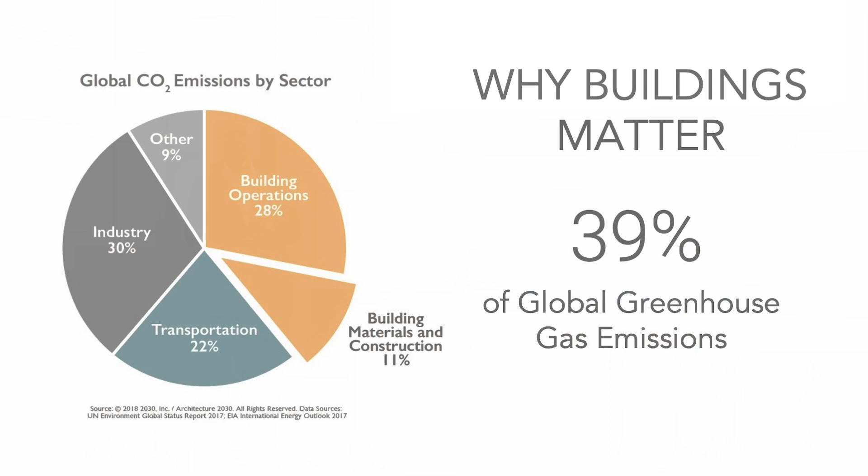So for burning gas in the building or using electricity that was made with a fossil fuel, there's CO2 emissions related to that. The other thing is building materials. When we make building materials, we use energy, or in making the building material, there's a reaction that releases CO2 or some other greenhouse gas. Like refrigerants for cooling systems, refrigerants are greenhouse gases in and of themselves. So building materials are part of the picture as well.

I also did want to make the point that building emissions or energy emissions, and I'm hoping that you guys have talked about this, do have a negative impact on our health. Okay, and so we could talk about climate change as sort of a future thing, although we're starting to feel it now, but air quality in America and many other countries is significantly poorer because of particulate emissions and emissions from burning fossil fuels.

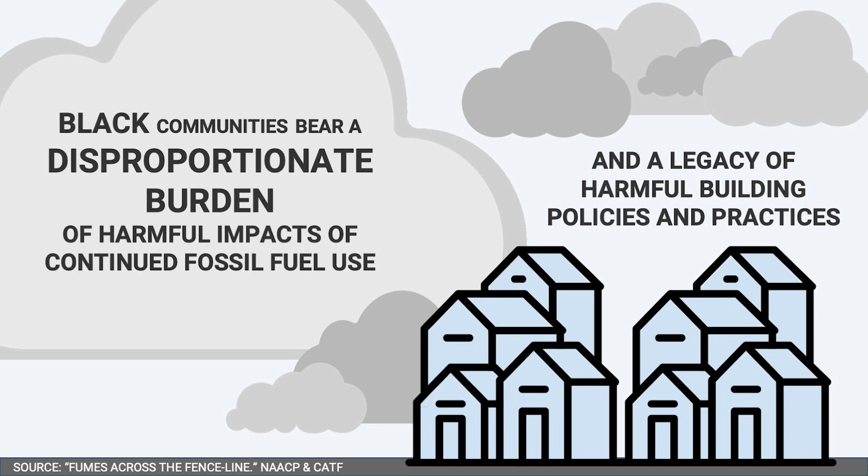And there's an environmental justice part in that as well, that Black communities in our country have a disproportionate burden of these negative emissions. And so the faster we can get fossil fuels out of the picture, the better off we're all going to be, but also we'll have a better and more equitable society.

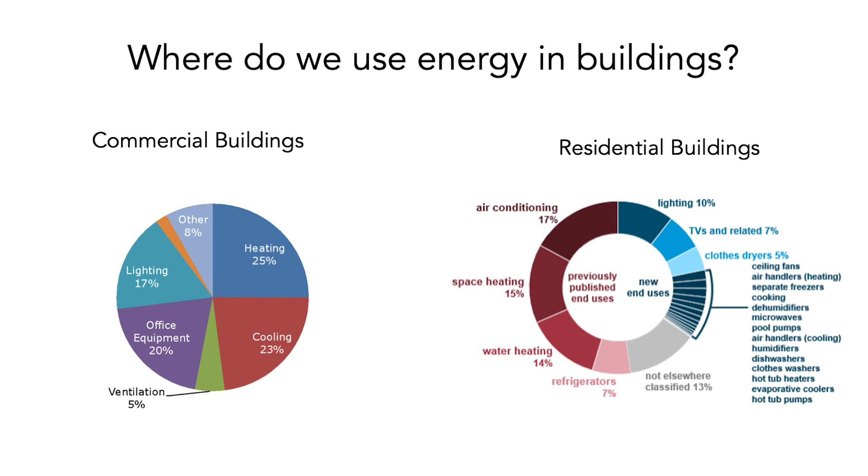So getting back to where do we use energy in buildings, and I do like to think about this if you're starting to think about buildings: where are the emissions? Where does that relate, or how does it come in? So commercial buildings and residential buildings are different. And we could take an industrial building as well, and a lot of times industrial buildings have to do with the process. But in a commercial building, there's three main categories. And most commercial buildings are offices, but there's lots of other types of commercial buildings.

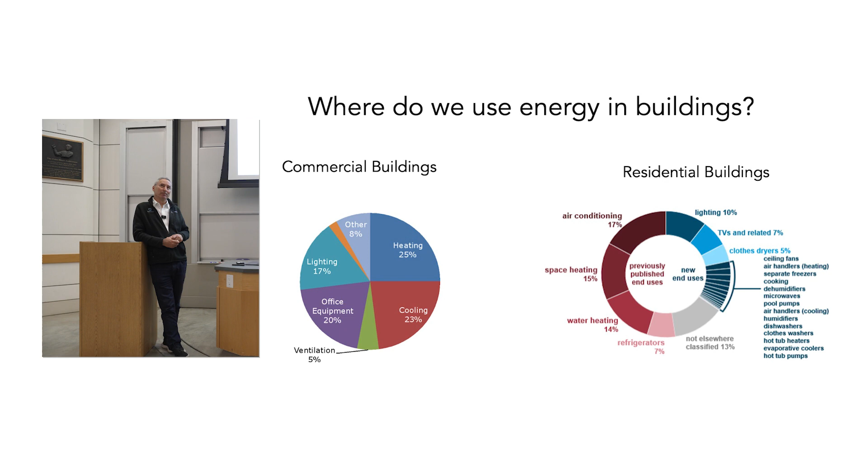But in a typical commercial building, which would be an office, or we could say non-residential building, the heating, cooling, and ventilation system is usually the biggest use. And that's if we look at national averages. In the Bay Area and at Stanford, Palo Alto, we have a mild climate, so it's less as a proportion. But we can say somewhere between a third and a half of energy consumption goes to heating, cooling, and ventilation in buildings. So I'm going to talk a little bit about that.

The other area is office equipment and other things that we plug in, so we call those plug loads. And then the third important category is lighting. Lighting, it's everywhere in buildings. So lighting does actually consume a good amount of energy, and it depends on what kind of lighting and things. I'll talk a little bit about lighting. And then there's miscellaneous and other, like elevators and such. There's a variety of things in the other category.

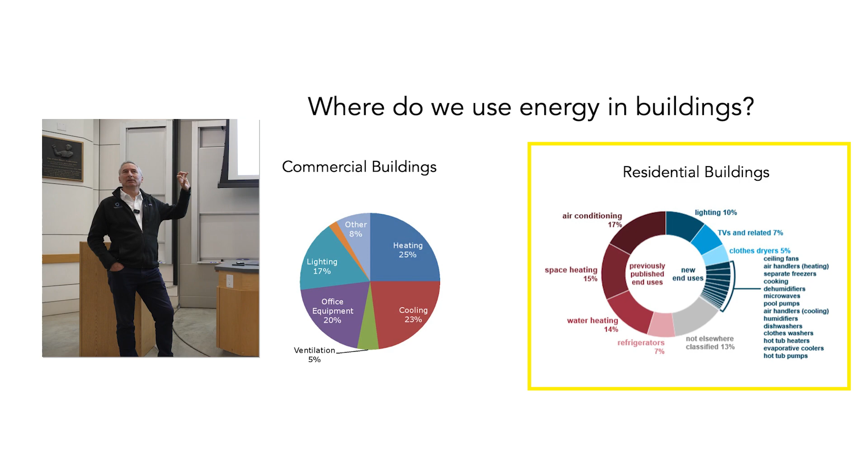In residential buildings, it's a little bit more complex because we have things like clothes dryers. There's a lot more domestic hot water consumption in a residential building. We have refrigerators. So there's a lot more things going on in residential buildings, but you can break it down into the heating, cooling, ventilating, lighting, appliances, and water heating. Those are the main categories.

So if we start to break it down for each one of those categories, how much energy is being used, what can we do to improve the efficiency of that, and then ultimately what can we do to decarbonize that? When you start breaking it down into these pieces, it becomes a little bit easier and makes more sense. So again, as I was saying, there's the operational side of greenhouse gas emissions, mostly CO2, and then there's the embodied carbon side, so the two elements.

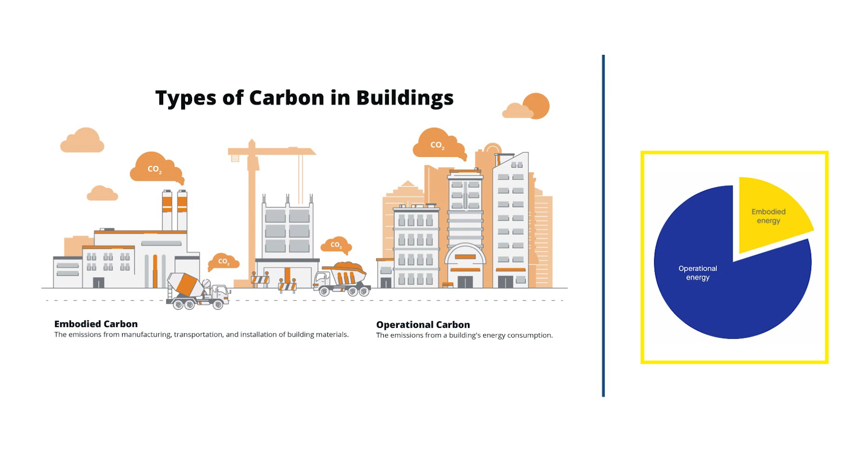And you can see the pie chart over on the right. If we can get the operational side to be decarbonized, and that's actually pretty easy, and I'm going to show you that, then we've got this little bit more difficult part of the pie. It's smaller, but the embodied carbon. And if you are at all involved with buildings, you'll know that probably the biggest thing in buildings as far as embodied carbon is cement.

Making of cement. Not only does it take a lot of energy, usually burning natural gas to create the reaction, but when the reaction happens, it releases CO2 in and of itself. So 6% plus or minus of global greenhouse gas emissions are related to making cement that goes into concrete. So if we expand out this thought of building decarbonization and start thinking about embodied carbon, what can we do to make a low or zero embodied carbon building? How do we do that?

Wood has low carbon emissions in harvesting it and preparing it and transporting it to a building, but it also sequesters carbon. It pulls carbon out of the atmosphere, and it's in the wood, as long as that building doesn't burn down, right? So low embodied carbon building materials. Wood is one. There's many, and then with the remaining carbon that is emitted in getting those building materials to the site, you can do things like carbon offsets.

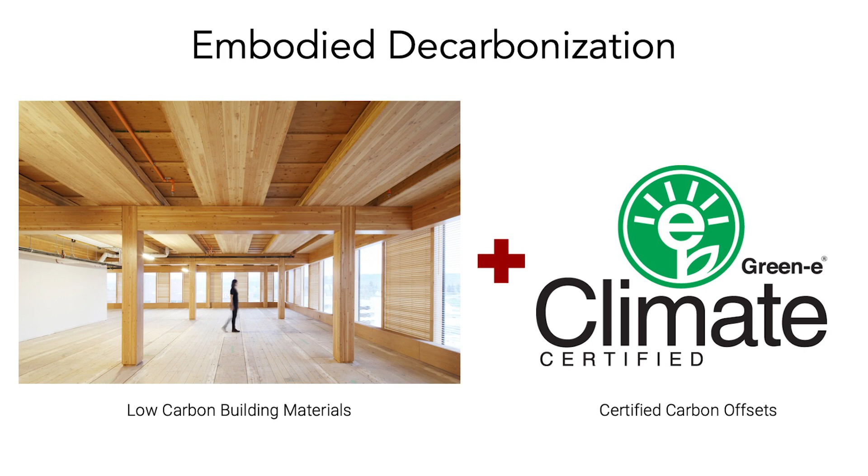And with carbon offsets, there's a lot of debate about how valid they are, but there are higher quality carbon offsets and there's lower quality ones. So when we're working with clients who want to do offsets, we steer them in the direction of higher quality offsets. So a lot of times what we're doing is this comparison for a project. What does concrete look like, steel and wood? And this is the embodied carbon for a 175,000 square foot office building that we were working on.

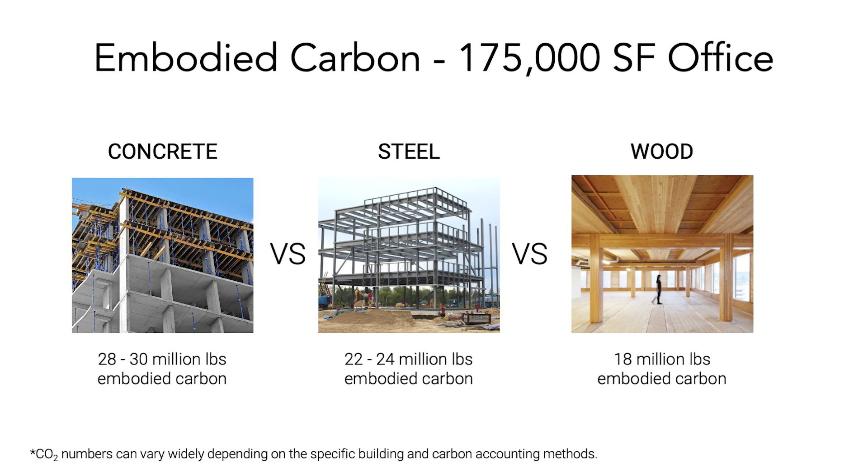And so we were comparing, and you can see that the concrete structure is not quite, but it's in the neighborhood of twice the wood. Okay, and so steel is a little bit better, but wood is much better. So there's a lot of discussion. Now, the concrete industry is like, well, wait a minute, this is bad news for us. So the concrete and cement industry are starting to think about how can we create different cement mixtures that have the strength that we need, but have lower embodied carbon.

And there's this one company that's out there called CarbonCure, where they inject CO2 into the concrete mix, and it reacts and can create this nano-sized mineral calcium carbonate, which gets embedded into the concrete. So it's an interesting thought.

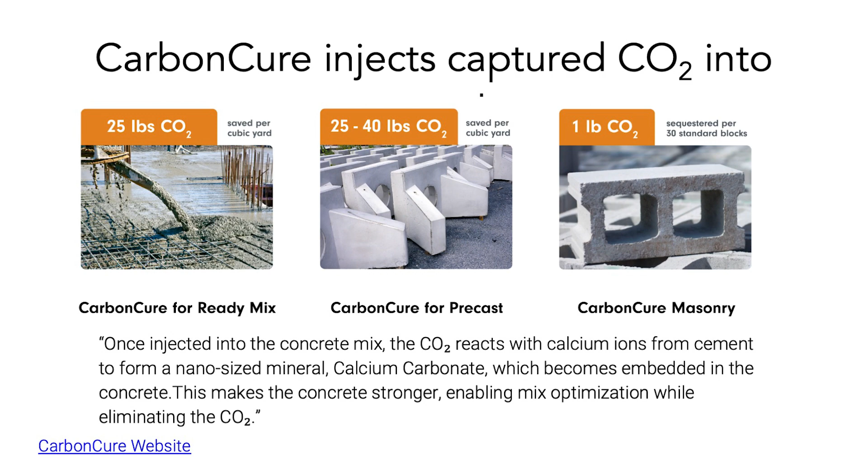There's a lot of research on this topic right now, not just this particular solution, but lower carbon cements. And a lot of that research is happening at Stanford. And there's several startups now that are manufacturing low carbon cement at small scale, and they're hoping to figure out how do we scale it up and make it affordable.

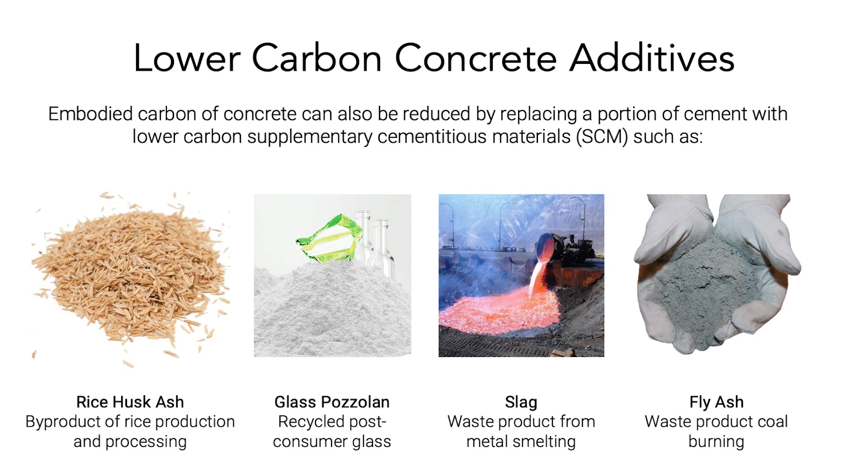So stay tuned, lots of changes are going to happen there. And there's even concrete additives that we can use that are usually a waste product or recycled product that can be added to cement that provides strength, but it's a product that we otherwise wouldn't be using, and it displaces some of the cement. So that's something that is actually being done now, and it's been around for quite a number of years.

So anyway, there's lots of things to talk about there, but I want to get back to buildings and energy, and the operational side of decarbonization has a lot to do with the energy. The idea is very simple. So first we make buildings more energy efficient, and there's a lot that can be done to make buildings more energy efficient. And then we make that building an all-electric building.

So we have an all-electric efficient building, and then we connect that all-electric efficient building to renewably generated energy, or renewable electricity, right? And so the final step is that renewable electricity powering our efficient all-electric building. And that's how we're going to do it, and that's how we are doing it.

Many buildings are being built with this framework in mind and are now plus or minus fully decarbonized on the operational side. So let's talk about the efficient building first. How do we get energy efficiency? And just thinking about lighting, heating, cooling, the different things that I mentioned.

Lighting is one of the things where there's been a full transformation in how we provide lighting in buildings. And we started, and many of you probably are familiar with incandescent lights. Then we used fluorescent lights, and there's lots of fluorescent lights in this classroom. And now we're using LED lighting of all different shapes and sizes.

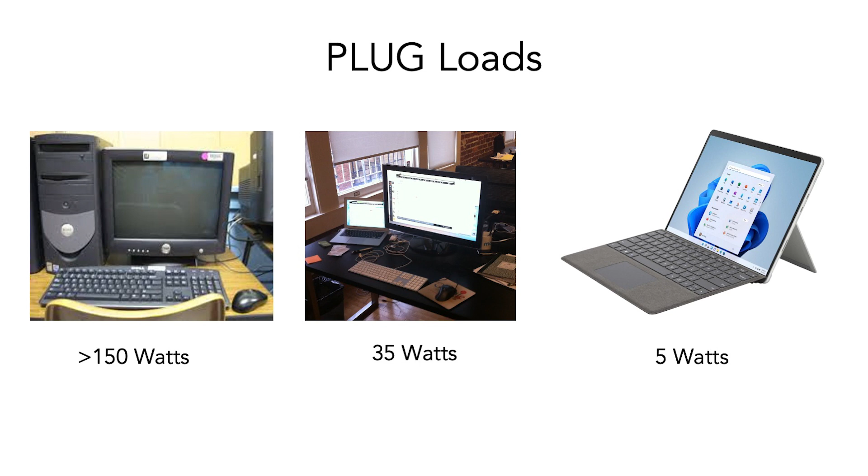And the new generation of laptops that you guys are using are very low energy because the manufacturers want the battery to last longer. Battery life has driven low power consumption computer chips to become a thing, not only in your laptops, but also in your cell phones. Right? So computer chips now are significantly more powerful than the ones that we had 10 or 20 years ago. And when I say significant, I don't mean 2 times more. I'm talking about 1,000 times or 10,000 times more powerful. But they're using a lot less energy than before. So if you look at that watts per compute ability, that ratio has just gotten incredibly good.

On the other side of that, we use a lot more computing. We do a lot more with computers than what we used to do. So the whole cloud and data centers, that has actually become a big energy use that we need to take into account. But in the buildings, the numbers have gotten really quite good.

In heating, ventilating, air conditioning, it's a similar thing. We did start out with buildings that were naturally ventilated 100 years ago. There was no air conditioning system. You just had to open the window. Very low energy, but didn't quite work in a lot of climates, right? So we started developing much more complex heating and cooling systems in buildings.

The state of the art in the 1950s was this thing called a constant volume system, where you're always running the fan at full speed and you're running the cooling at full speed, and then you use heat to modulate the temperature in the room, even though the air being delivered is cold. We use heat to heat it back up, and it's always going at full speed, constant volume. It was energy hog galore. I mean, really, really bad.

And now we're using variable air volume systems that cut the energy down in commercial buildings basically in half. And there's a new generation of heating and cooling systems like chilled beams and radiant panels, and even low energy versions of variable air volume systems that are significantly better. If you're looking for a good example of that, the Y2E2 building at Stanford uses chilled beams; it was built about 10 years ago and is much lower energy than our variable air volume systems. Again, just trying to give you a snapshot of what's possible.

When we do a standard pumping and piping system for a heating and cooling system, it usually works out to about 15 watts for every gallon per minute of fluid that we're pushing around, heating and cooling water, right? When I work really hard and do my low friction design, which I love to do, and my mentor was one of the world's best people on that, we use 45s and smooth pipes, and we design things in a very smooth way. I can get to 7 watts per GPM.

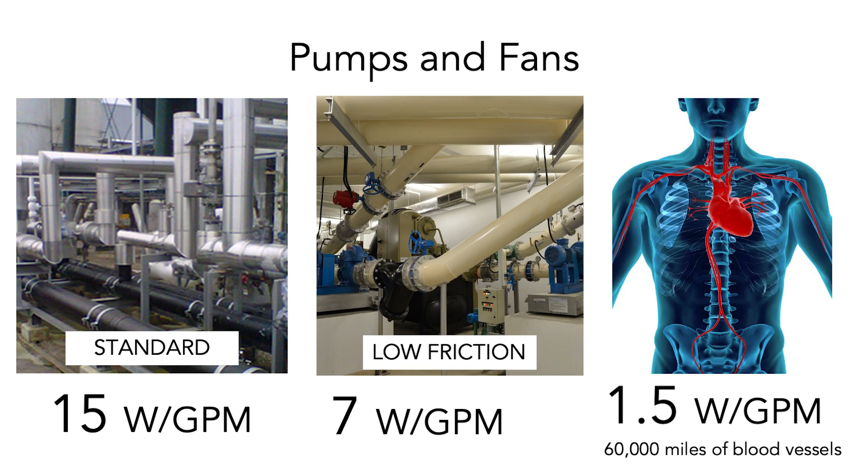But I feel like I'm still a failure because, and you can look this up, the human heart operates at about 1.5 watts per GPM. And in your body are 60,000 miles of blood vessels, so it's quite a complex array and pumping system. And if humans were to try to recreate that, we'd end up with something where your heart would need to be 10 times bigger than what it actually is.

So just imagine that. You'd have to eat a lot more food and spend more time of your day eating, right? So that'd be sort of annoying.

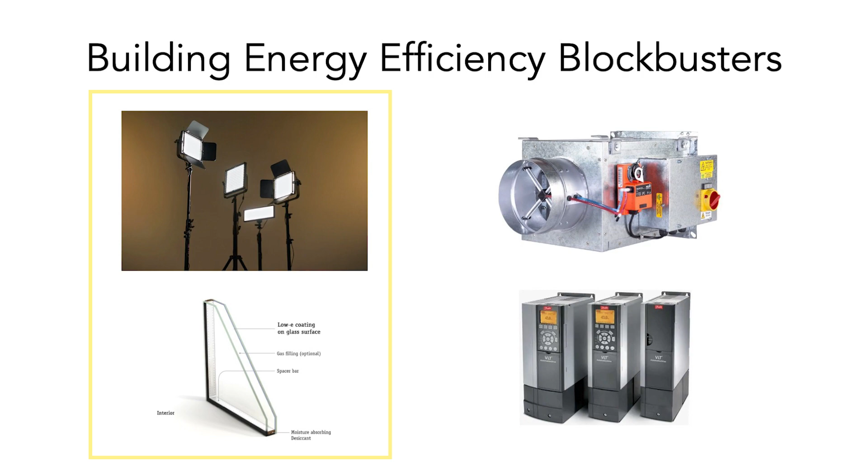So on the bottom right is variable speed drives, and we use those variable speed drives now to control the speed of a fan or pump, so it can go up and down instead of that constant volume, constant flow. We're now varying speeds of pumps and fans, and this is also used in industrial processes and such. And then low emissivity windows, LED lighting, all that stuff has really changed how we do buildings.

There's a standard for building energy efficiency that many states use and many building designers use as a guidepost for how efficient is your building, or just what's the minimum that we need to do to make it an efficient building. And it's interesting, that standard was first written in the 1970s during the oil crisis, when people were starting to say we need to think about energy. If you compare a building that was designed to the standard around 1980 to where we are today, and meeting the standard is not very hard, it's in the neighborhood of a 50% lower energy consumption.

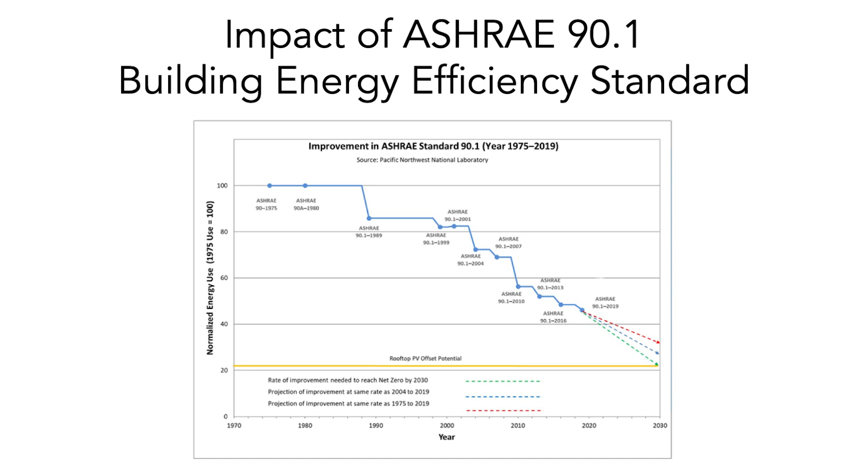So we're designing buildings today as a common practice that are 50% lower energy than where we were in the 70s or early 80s. And for me, pretty much all the buildings I design are using 50% of this standard. So there's another 50% that's easily harvestable. And what I try to do is be out in front so that the people who write the standard know that it's not that hard to do even better, right? So that's been put together.

And I did a thing for Duke Energy a while ago, in North Carolina, where we discussed with a group of people what were the state of the shelf, the things that were off the shelf that we could do to make buildings more energy efficient. So we said, look, the baseline would be to meet that 90.1 standard. We apply a better building envelope, better glass, better insulation, not overly complex, and then better lighting with daylight, where the light can dim down automatically.

And then we do some plug load improvements, some things that we could do to get computer energy use down. And then our low friction system, which I was showing you, and then heat pumps. We put that all together and we can get 44% savings, really easily. I was just saying, state of the shelf, easy stuff. And a lot of folks on the video presentation I was doing were like, wow, but several were like, yeah, I've done that, right? So making buildings more efficient is not necessarily that hard. We leverage a lot of things that are currently available.

The thing that I love the most is the efficient building envelope, more insulation. It's passive, there's no moving parts. It's like my solar clothes dryer. So I love the passive strategies.

And then we put solar on 40% of the roof and then 80% of the roof. And when we got to 80% of the roof with solar, and this is a 3-story building, the solar was making enough electricity on an annual basis for the building. So the building was making all of its own energy. And then we also like to use batteries in buildings now for obvious reasons.

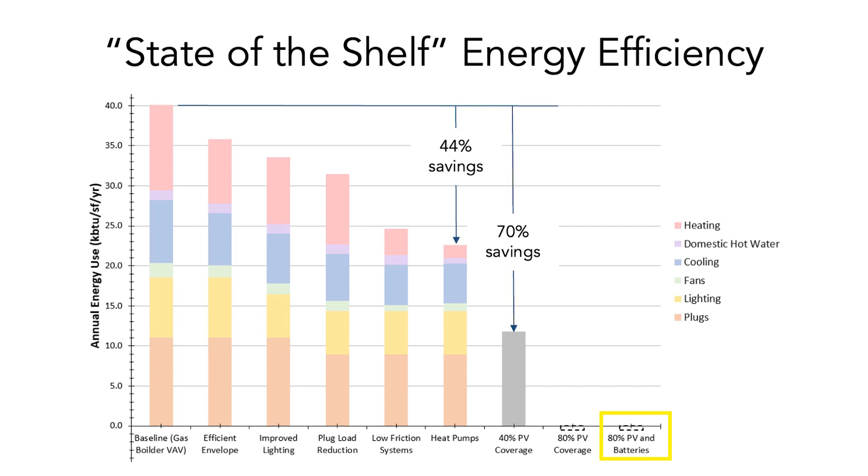If we work in a more integrated process, so if I say to the architect, if you put more insulation in the wall, then my heating system can be smaller. It's very simple stuff. But so much of design of buildings is disintegrated, where the architect does their thing, the engineer does theirs, everybody sort of works in separate silos and you don't come up with good results.

I think AI is going to be really important for energy optimization in buildings. Buildings generally, especially commercial buildings, don't work very well. They're not tuned up because there's so many data points and there's lots going on. AI is going to help to fix that, and I've already seen a few companies in that area.

Induction cooking, which I'm going to show you a little bit about. And then solar and batteries, of course, is transforming buildings. And that solar and batteries is either at the building or at utility scale. So I'm sure you guys are talking about that, right?

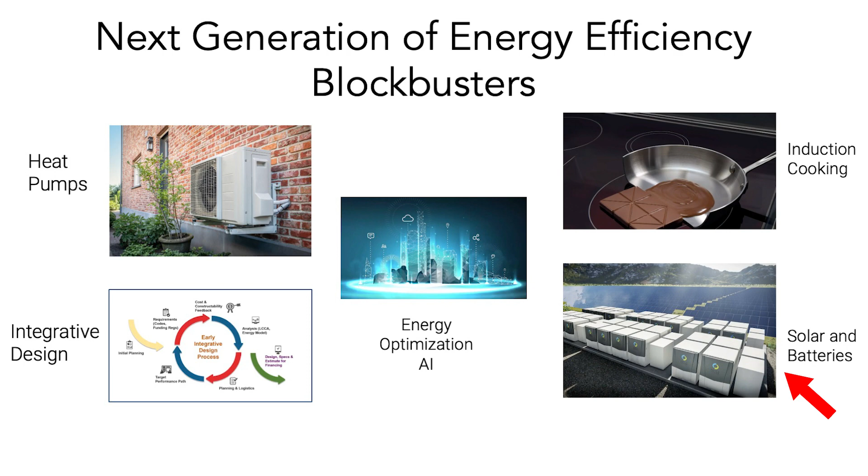So there is a professor, Jim Sweeney at Stanford, now emeritus, who wrote with his grad students this book called Energy Efficiency: Building a Clean, Secure Economy. So Jim is interesting because, and Diana knows him much better than I do, but for a long time he was a real skeptic on energy efficiency because he's an economist, a somewhat conservative economist who worked in the Reagan administration. He says, this energy efficiency thing, it's not really a thing.

People will just buy it if it makes financial sense and so on. But there were a lot of people pushing him to think about it differently. So he said, look, I'll do a study. I'm going to get my grad students together. We'll do a study. And what they did is they picked apart the U.S. economy and they said, what was the energy intensity or efficiency of airplane travel? So how many gallons of jet fuel per passenger mile over a 30 or 40-year period?

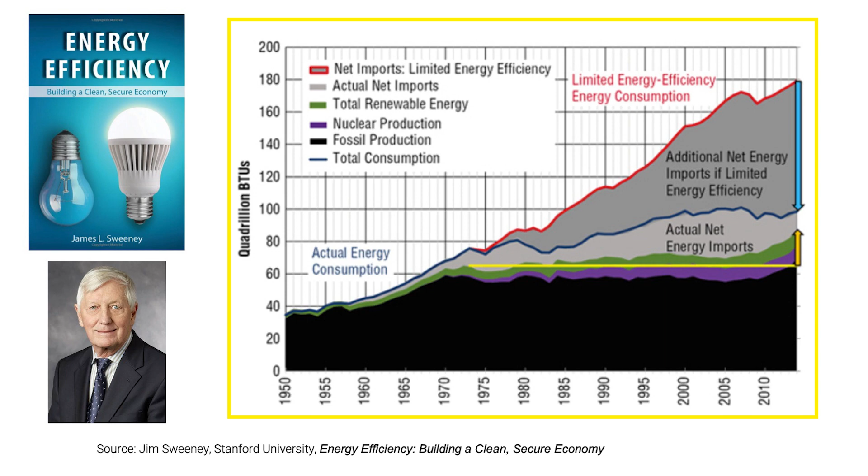And this was through 2015. So we need to update it, but through 2015, that was significantly more, several times more than all of the new nuclear or renewable energy that was added to the US grid, right? So this is a super significant finding. Energy efficiency is a resource.

And so a lot of energy planners and policymakers have been thinking about energy efficiency as a resource and part of the mix of how we meet energy demands or service demands. We don't really have a demand for energy. We have a demand for light or heat and cool, right? So we just want to deliver those same things, but by using less energy.

So the next step is this building electrification. And how are we going to electrify buildings? So if you think about it, buildings already use a lot of electricity. Lighting is electricity, right? We don't use gas lamps anymore, thank goodness. But we still do burn fossil fuels at buildings.

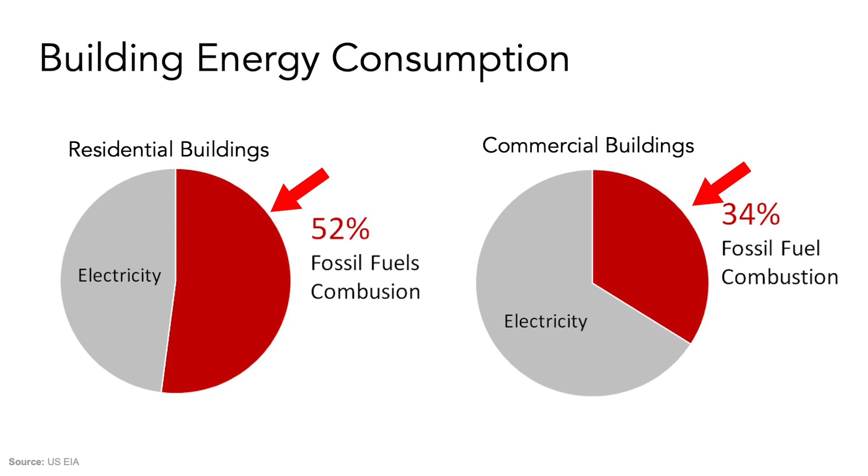Most of the burning of fossil fuels at buildings in the US is natural gas used for heating different things. So it could be heating a room, or heating water, domestic hot water for showers, or a dryer, or cooking, right? So in the residential sector in the US, half of the energy is used for these heating needs. And then in commercial buildings, it's less, like 34% nationally, right? So there's still a big chunk that's natural gas. Meanwhile, the electric grid is getting lower and lower carbon every year.

So 160 cities, 8 states, and this is a year or two old, I think there's a little bit more, have already made commitments to be 100% carbon free on their electricity. And so in California, our plan is by 2045, all of our electricity will be carbon-free electricity. That's actually a state law. All of the electric utilities have to follow that, and they're actually well ahead of schedule. And each time there's been sort of an improvement or a ramping up of the requirements, utilities have been able to beat it, a couple years ahead of schedule. So.

The electric grid is getting cleaner, and burning natural gas still emits the same amount of CO2, and there's not a lot we can do to change that. So the idea is move over to electricity. And so the different gas uses that we have, how do we electrify them? So the space heating, gas boilers, burning gas to make space heating, one form or another, we can use heat pumps to make heating, and I'll show you that. Domestic hot water, we can also use heat pumps. This is an efficient electric way of making heat. And then gas cooking, we can use induction cooking.

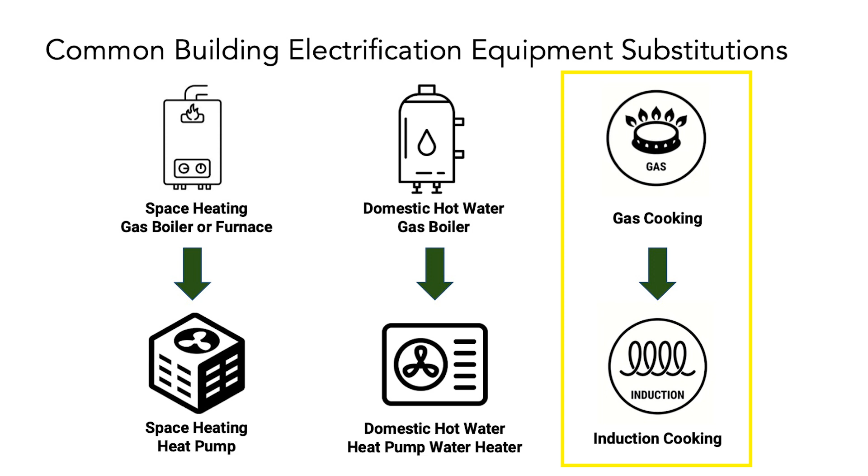So how does a heat pump work? Well, if we compare it to a boiler, when we're burning natural gas, you put 100 units of gas in, and we'll get somewhere around 85 units of heat out, 85% efficient, right? But with a heat pump, it's really interesting. It uses the refrigeration cycle, which is in air conditioning systems, refrigerators, your car air conditioner. We use the refrigeration cycle to pull heat out of the outside air. So even on a cold day, we can pull heat out of the air. And sometimes you pull it out of the ground with a ground-coupled heat pump.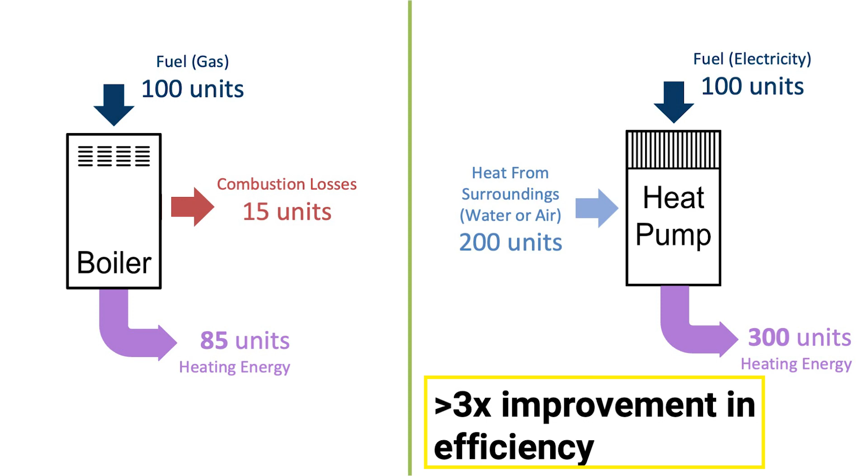So we use the electricity to run the compressor. The electricity isn't actually turned into direct heat. It's used to run the compressor that then puts heat into whatever form, air or water, that we're trying to create to heat a building. So we can put 100 units in and we get 300 units of heat out, right? Remember over here on the gas, we put 100 units in, we get 85 out. So this is significantly better. It's, in a sense, 3 times better or more in most heat pumps, improvement in efficiency. So that is a very big deal.

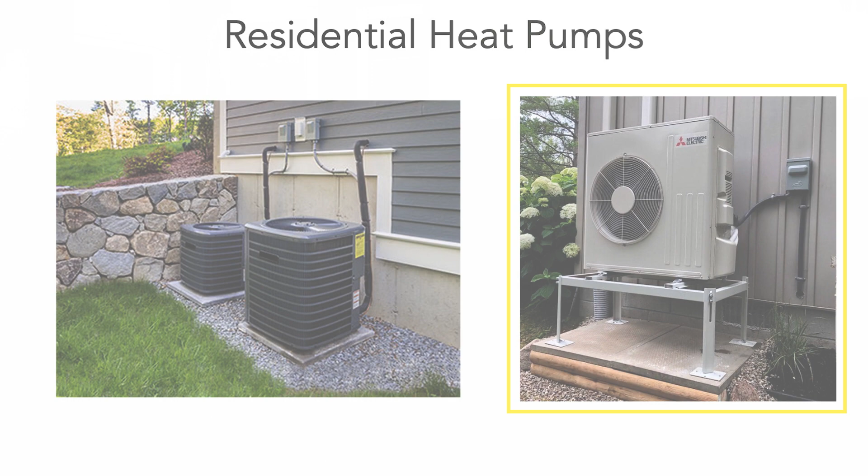And this is what heat pumps look like in a residential setting. And the ones on the left look a lot like an air conditioner, and that's because they are. They're a heat pump that can make heat in the winter, and then it reverses in the summer, it can make cooling. So that's one of the nice things about heat pumps is it can do both. So on the residential side, you can buy one piece of equipment to do both, if you're in that climate that needs both, right? And there's a new generation of these smaller units that are more efficient than the ones on the left. And they're widely used throughout the world.

And heat pumps in residential are a big part of Europe's plan to quickly and rapidly get off natural gas, because of the Ukraine war natural gas supplies were rapidly diminished, and so part of the solution was like, let's quickly ramp up the use of heat pumps. There's a huge growth in the heat pump sector globally. That is, the manufacturers are really doing quite well.

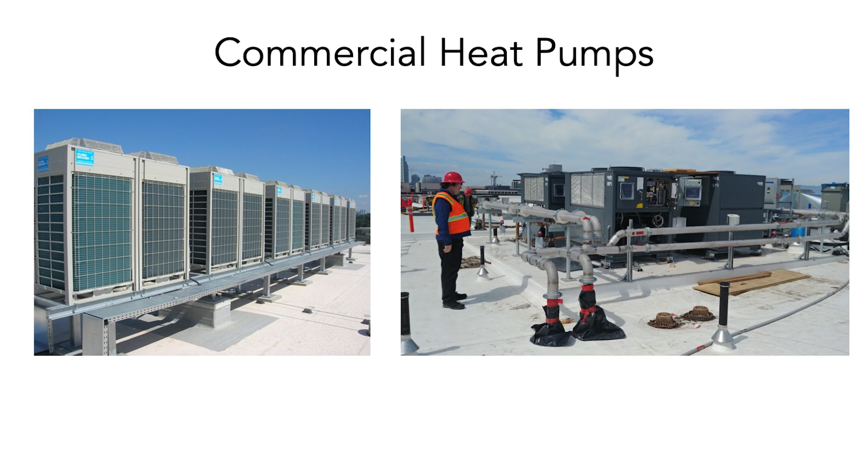But there's commercial versions of heat pumps as well, and this is where I work, and these are a couple of buildings that I've done where we have big racks of heat pumps on the roof, and there's different types of systems, and they'll make heating and cooling or just hot water. The one on the right is for making hot water. The one on the left is what we call variable refrigerant flow. It makes heating and cooling. And if one zone of the building needs cooling and another needs heating, the heat actually gets transferred from the hot zone to the cold zone with very little compressor activity there. So there's some real interesting things that are happening with this new generation of heat pumps.

And then there's very large scale heat pump systems. This is the Stanford Central Energy Plant. And Stanford had a large cogeneration energy system that was installed, I think, in the early 80s. And it burned natural gas to make steam and electricity, and then they used the steam in this special kind of cooling system so they could make chilled water to distribute around the campus.

It turned out that cogen system was the single largest CO2 emitter for Stanford, as in its CO2 footprint, by far. It totally dominated. And it was coming up on the need of a major renovation and upgrade. It was going to cost millions of dollars. And luckily, Stanford decided to not proceed with that very expensive upgrade to a system that would lock Stanford into very high CO2 emissions for several more decades.

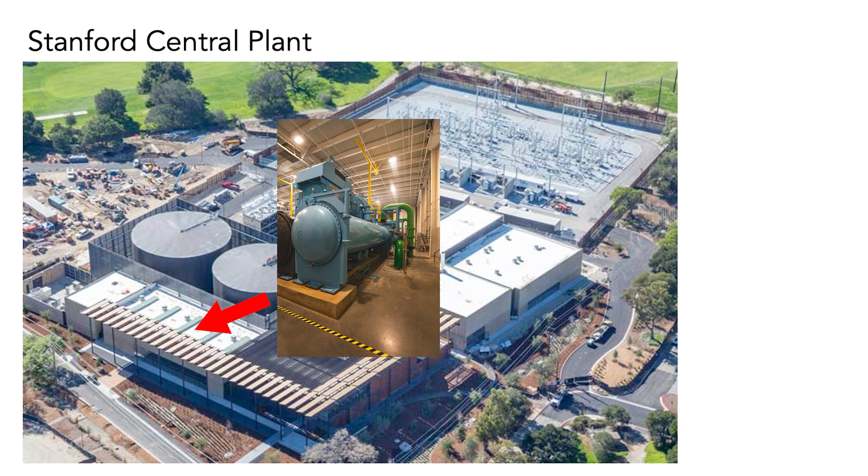And they scrapped that system and they built this new central energy facility. What it is, there's these big, what are oftentimes called chillers, but cooling machines, refrigeration machines that are set up to do heating or cooling or both. And then the tanks that you see there are big thermal energy storage tanks.

So in the afternoon on a warm day, there's lots of cooling at Stanford. So they're sending cold water from the central plant out, but what's the waste product of making cooling? It's heat. Because when you cool the water, you're pulling heat out of the water. And so it's waste heat. So what they do is they store that heat in one of those tanks,

and then the next morning when you need morning warm up, there's lots of days where there's cooling in the afternoon and heating in the morning. The tank will be full of hot water and they'll send that through to the campus, and the campus will start using the hot water that was made the day before as a waste product. So it's very, very energy efficient, but it's also all electric, right? So this is that heat pump idea on a large scale.

When we start talking about cooking, when we burn natural gas in a kitchen, inside, it not only releases CO2, but it releases nitrogen dioxide, carbon monoxide, formaldehyde. And there's a recent study by Stanford, benzene is another thing. And all of these things are in concentrations that are unhealthy. And this is one of the things that adds to people's

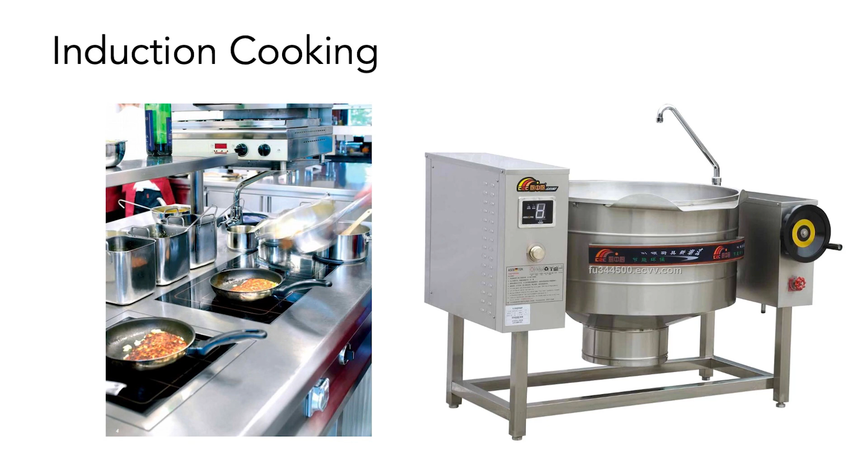And induction cooking is different than using electricity to create a hot element that turns red. Many of you might have seen that kind of electric cooking. It's unsafe and it's not very good. It's not very fast. But induction cooking is where you create a magnetic field with a coil underneath the glass, and when the pot is one that responds to a magnetic field, so not copper, not aluminum, it needs to be steel, stainless steel, cast iron, those kind of pots, then it heats the pot itself and nothing else.

And so the pot actually can heat up quite fast. I have an induction stove in my home, and it boils water faster than the gas stove I had before that, and it was a nice gas stove. And it also is very good at being precise. So I can turn it down to halfway or a quarter way, and it quickly responds to that. So it's actually quite nice.

And now there's a growing number of high-end restaurants that are starting to discover induction cooking. It's good for cooking, but it's also safer for people who work at the stove because of the air quality and burns, and because you're not heating up the surfaces around a gas stove, it's easier to clean up. So I think we're going to see this really take hold. I work with a lot of commercial tech clients in the Bay Area and also abroad, and all their new commercial kitchens, like restaurants, they're putting in as 100% electric.

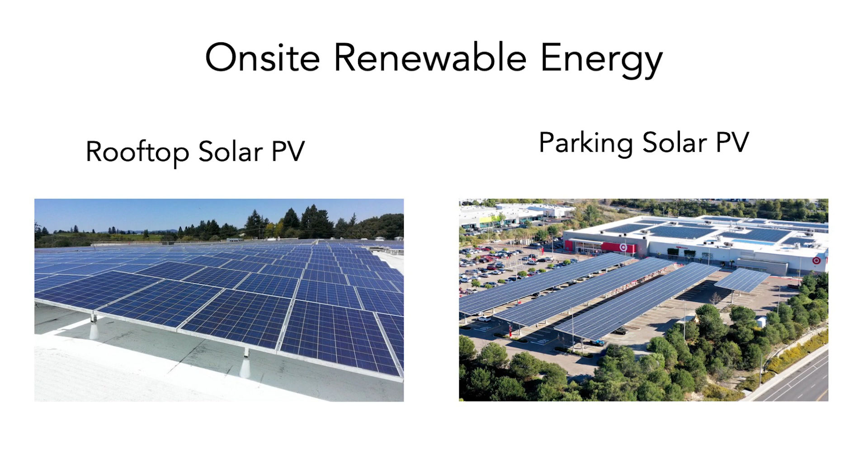So we're seeing that happening, but solar on buildings is actually a fairly practical thing. In most of the places where I work, putting solar on a building will generate electricity cheaper than buying electricity from the grid. And I have lots of friends who I've convinced to do solar on commercial buildings. They're not like super environmental. They're not green or anything like that.

But when I show them the numbers, I say, in California, we can generate solar electricity at 10 cents a kilowatt hour. Now, it's a little bit more expensive, solar in California, because our labor rates are higher. But it's around 10 to 12 cents a kilowatt hour. Whereas buying it from the grid is between 15 and 17 cents a kilowatt hour.

So when I show the numbers, I have a friend who owns a large construction company, and I showed him the numbers, and he's like, okay, we're going to do that. And last time I saw him, he gave me a big hug. He was like, Peter, you're so great. I love you, man. So it's like, okay.

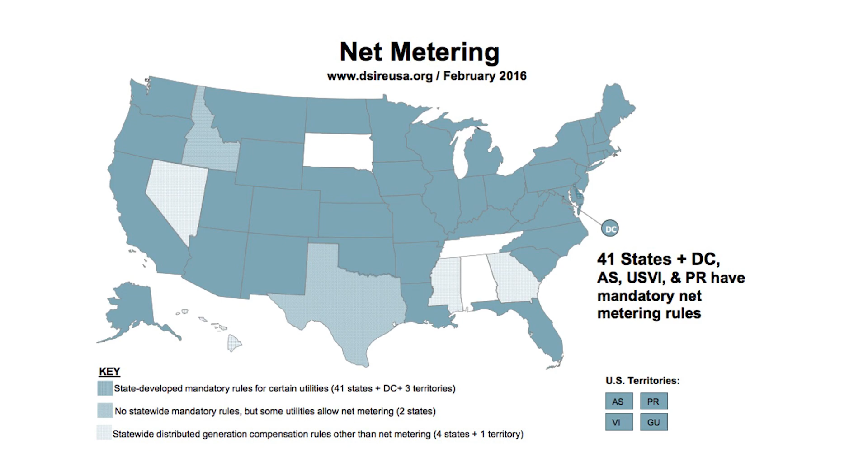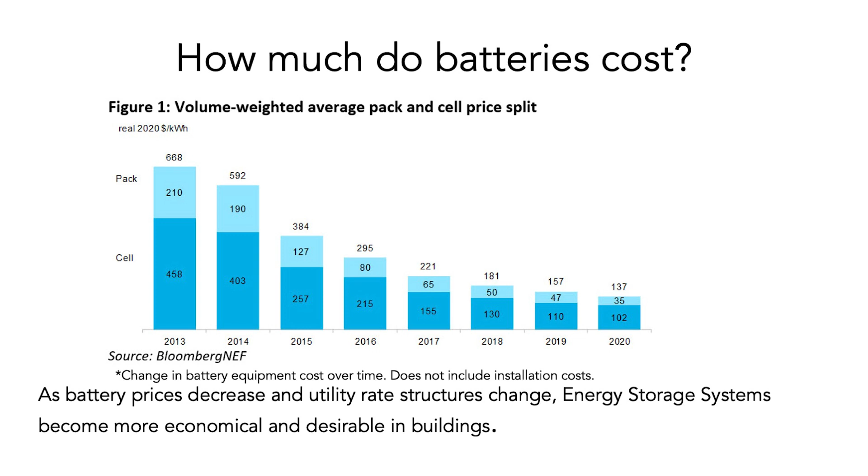All right. And then there's this whole idea of net metering and the evolution of net metering. I'm not going to get into that, but that makes solar practical. The other thing that's happening is the cost of batteries is coming down. And we're not at the bottom of the curve on that at all. But battery storage is going to make not only storing solar energy that we generate during the day and make it available to us at night, right? It's not only going to be able to do that, but we're in this heavily dominated by renewable grid that's going to eventually occur.

We're going to have the duck curve and some of these other things where electricity is going to be really valuable at night, and being able to store from the day into the night, either at the building or at the utility scale, is going to be really important. So we're actually finding batteries are financially cost-effective now, where utilities have time of day rates and seasonal rates, so that there's a big difference between daytime and nighttime.

And so some buildings are getting batteries with no solar. They charge up the battery in the middle of the day when electricity is its cheapest, and they discharge the battery in the early evening when electricity is most expensive. So we call that energy arbitrage. It's not really proper arbitrage, but that's what's happening. Building owners are now buying that as a thing.

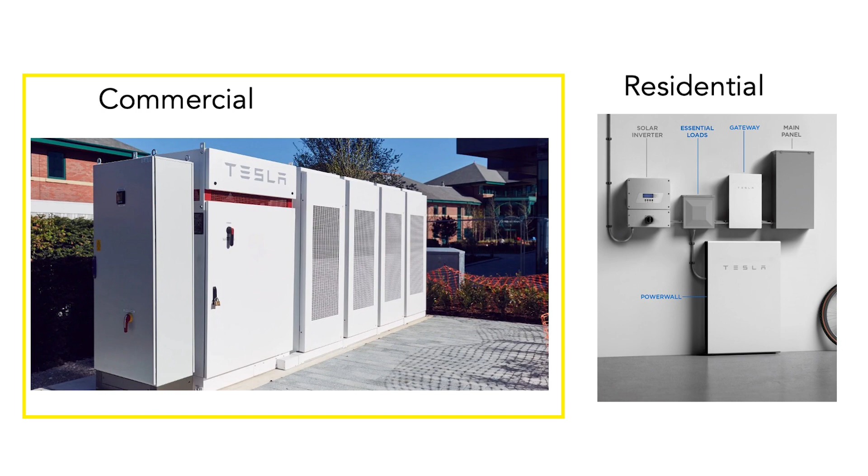So lots is happening. And there's the Powerwall, the thing on the right. We've seen the thing that people put in their homes, but Tesla and other companies are now making big battery banks that are designed to go with buildings. So we can get solar and batteries at the building, but what if you have a large building or the roof area is not big enough for solar?

Well, we can do this community choice aggregation or different versions of that, where in many places in the US now, you can select what your generation is and where your generation dollars go. And we have this in California, but it's available in lots of other states where I'm doing projects. And the incremental cost of buying the renewable generated electricity is typically less than 10% increased cost. So, very modest cost and getting lower every day. So that's really good news.

All right, so there are a couple barriers I want to talk to you guys about. The payback barrier. Why? So if all this stuff makes so much sense, why isn't everybody doing it right now? Well, there's lots of reasons, but I wanted to show you a couple. And we were talking about this earlier today. I'm working with a company. They have a big facility in Miami. And the CEO of the company, it's a multinational, said, our company is going to go carbon neutral by 2035.

We got lots of money, go out and do it. And so we're with this national facilities meeting with all the people, and the guy from Miami is like, yeah, we have to redo our roof because it's old. And we're like, well, you're going to put solar on the roof, right?

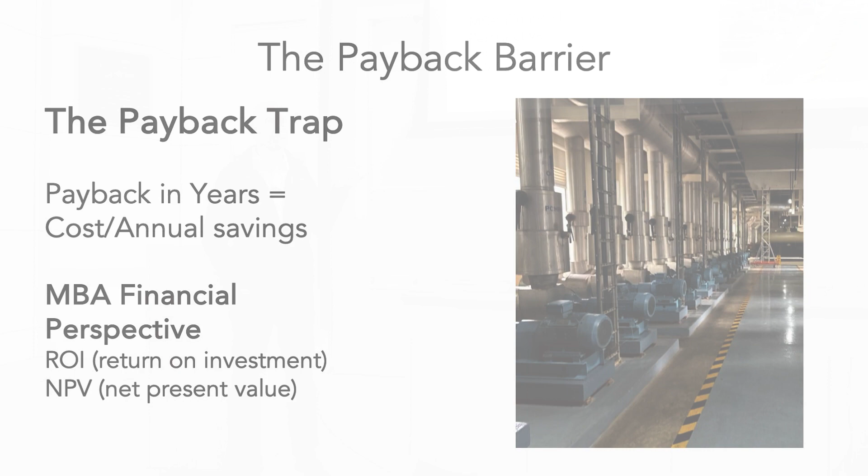And I said, well, the return on investment is well above 20%. They can borrow money in the neighborhood of 5 to 10%. And we can give them a guaranteed, very low risk, 20%, 30% return on investment. So financially, it's a no-brainer. But the guy that I was talking to said, no, we can't do that, because that translates into this thing, payback. It's a simplistic way of looking at an investment: how long does something take to pay back?

So he said, well, 20% return on investment is a 5-year payback, meaning if I spend $1 million, I'll save $200,000 every year. 5-year payback. And he said, we don't do 5-year payback. We do 3-year and sometimes only 1 year, meaning if I spend $1 million, I have to save $1 million in the same year. That's over 100% return on investment. It's ridiculous. I mean, that's really good.

But what it does is most of the bigger energy savings, it compromises going after them. And so, when I'm talking to my clients, I say, no, don't get into this payback trap. And on the phone, I was trying to coax this guy down and say, come, we've got to look at it a little bit more rationally here, and we've got to talk to the MBAs in the company. And that particular company has a lot of them, so.

Anyway, just a couple of case studies. We're doing the AIA, American Institute of Architects headquarters building in Washington, D.C., built in the 1970s. It's right near the White House, a really significant building. And we're making it efficient. We're going to replace the windows, we're putting in new lighting, and we're doing a variety of other things to make it more efficient. Then we're electrifying.

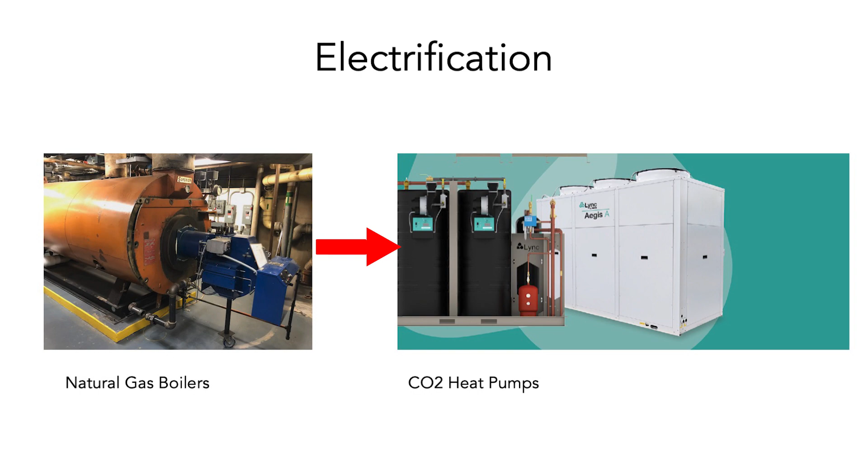We're taking out these natural gas boilers, putting in heat pumps up on the roof. And then they have a little bit of solar on the roof, but it's only 10% because it's a 7 or 8 story building, and they can only fit a little bit of solar on the roof. So in Washington, D.C., there's this program through the utility, PEPCO, called DC Power Connect, and you can choose your electricity generation, and they're choosing this one called Clean Choice Energy. So they have 100% renewable generation, wind and solar.

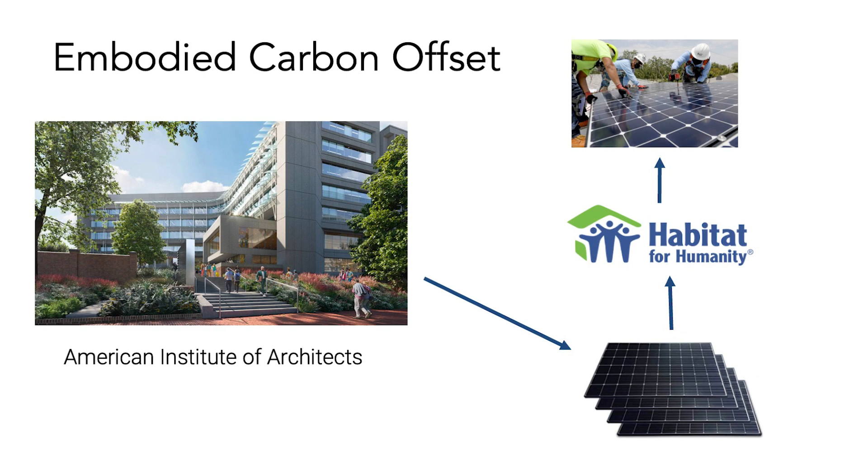Right, so all their generation dollars in their bill go to Clean Choice Energy, who buys renewable electricity. So they're getting an efficient building, electrified building, and 100% renewable electricity. So they're decarbonizing the operation. Now, in the embodied carbon, they're saving 80% of the embodied carbon by reusing the building and not building a new one. That's the biggest win, is to reuse the building. In the US, we have lots of buildings. We don't need to build that many more buildings.

So they're doing that, but they are putting in new glazing, new furniture, that all has embodied carbon. What they're doing to offset the embodied carbon is they bought, and this is already happening, solar panels and the inverters, and they donated them to Habitat for Humanity, who's then going to install them with their labor. But part of the deal is we donate these solar panels to you, we get 100% of the credit for the carbon reduction. And so the Habitat guy said, fine, that's great, because all we care about is low energy bills for the people that we work with.

And so this is all happening in DC and Northern Virginia. So it's helping the community have lower bills and create affordable housing. So it's helping the community, but it's also getting them to fully decarbonize on the embodied carbon side. So it's a very creative, interesting thing. So this building, which is under construction now, when it's done, will be a fully decarbonized, both embodied and operational, renovation of a large building. It's one of the most important building renovations that's going to happen in the US over the next couple of years. So keep an eye out for that.

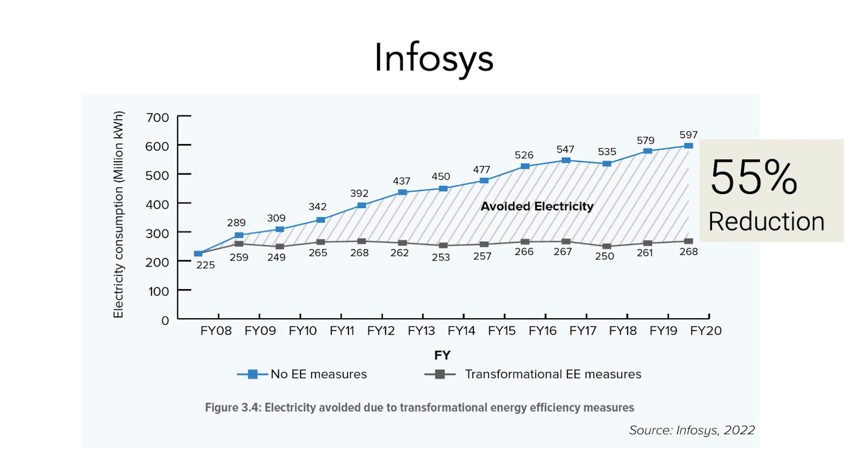And over that period, they've reduced their per capita energy consumption by 55%, which is amazing. I don't think there's any other large company globally that's achieved anywhere near as significant energy savings as this. So it's not just something that makes sense in the US, this also makes sense in a wide variety of countries. So we're doing that.